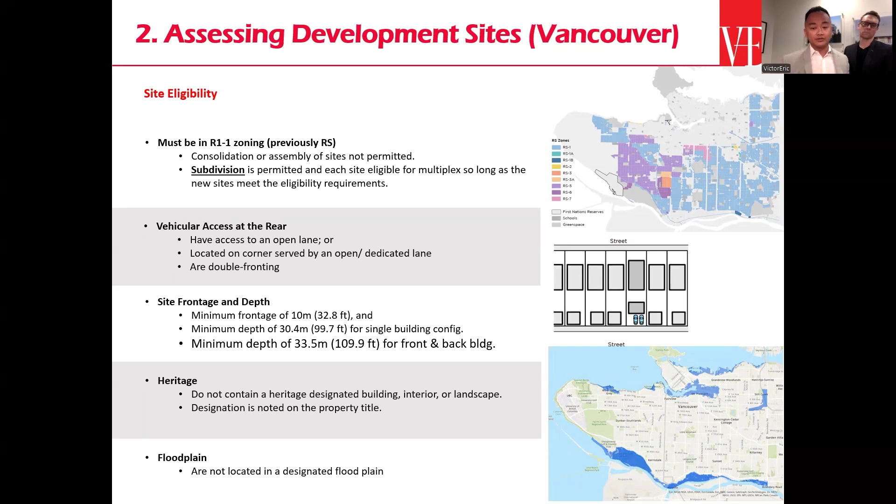Last but not least is the floodplain. As you can see on the bottom right, there are areas in the Vancouver map that are in the floodplain region. Although the city wasn't clear whether we can build there, I think the main concern is the cost of building in those areas, because you'd need to acquire a geotech engineer, which might involve pilings, significantly increasing construction costs. The city, in one of our inquiries, advises that if your lot or property is within these areas, they would strongly encourage not building a multiplex development.

The next item to cover is the site configuration requirements. This is very important for those looking to develop a multiplex, because it will give you an idea of how to configure your site—whether you want a courtyard configuration or a single building configuration type.

So what you have here in the site plan is a courtyard configuration, meaning there's a front building and a rear building. Between them is a courtyard, which requires a minimum 20-foot distance between the two structures.

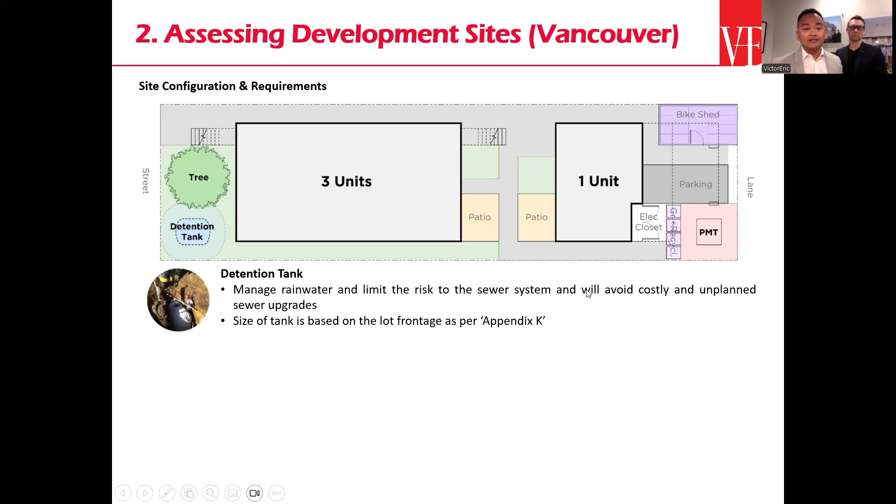In terms of requirements, there are three things the city wants us to consider, outlined below. First is the detention tank. Detention tanks are now a mandatory requirement for multiplex site development, to minimize the amount of water going into the city system.

In terms of tank size, you can refer to the appendix found in the city's website, which can also be searched via Google.

One of the reasons they're asking for this is they've been quite permissive in terms of site coverage, increasing the impermeable area allowed. Vancouver is largely on a combined sanitary and storm system, and when there are heavy rains and everyone loads into the system at once, it creates an overload situation, which is not good and can lead to all kinds of problems. The detention tank lets water from the site slowly into the city system, which it is able to absorb over time.

The next item to consider is new tree planting. There are sites in Vancouver that are heavily dense with existing trees. If your site is one of those, the city isn't going to tell you that you can't build a multiplex—you can, by any means—but there's a minimum requirement of replacement trees you'll need to provide, based on the lot size and the amount of trees being cut or removed from the property.

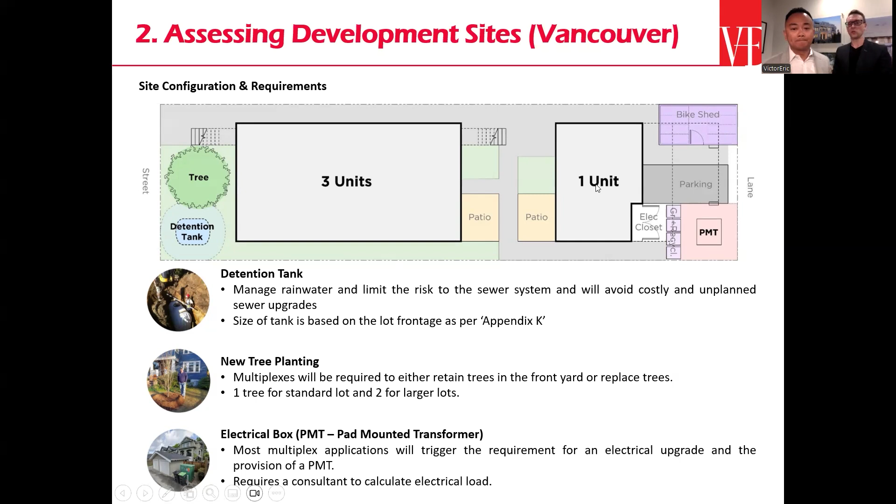Just real quick, basically Vancouver transmits its power lines at high voltage, 25, 50, 75 kilovolts. In order for the homes or a project like this to use it, it has to be stepped down to a usable voltage, 120, 240 voltage, which we all use. That's why these are required.

Okay, so moving on to what are the fees. For the city to allow you to build up to a 1.0 maximum on a standard, previously single family and duplex zoned area, they're going to want something from you in return. So the next item I'm going to go over is what we call the density bonus fee. Don't mistake it for the DCL or DCC fee, this is in addition to that fee.

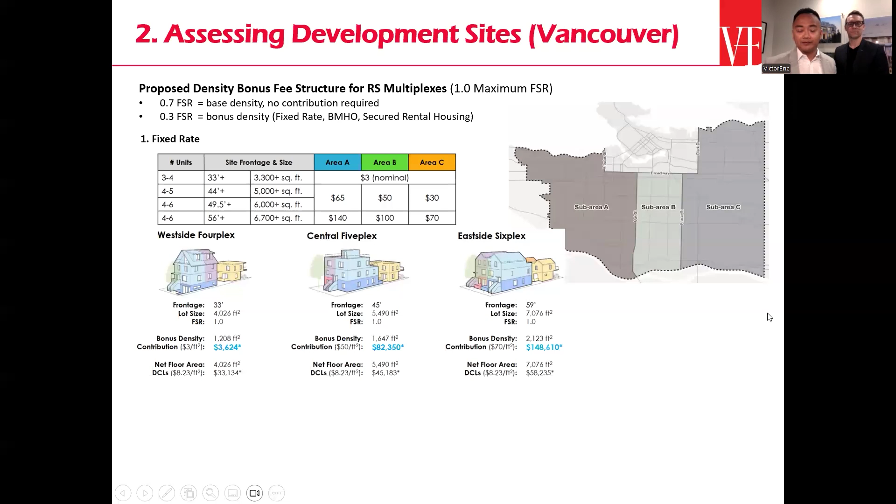So what is the density bonus? You'll notice at the top right of the sheet, the Vancouver map divided into 3 sub areas. Sub area A is to the left side of Oak Street, anything west of Oak Street. Sub area B is between Oak Street and Fraser Street, and sub area C is anything east of Fraser Street. Now why is this important?

It's important because that dictates how much density fee you're going to pay, also based on the size of your lot and the type of development you're doing on that property. So the density bonus fee is a charge on the 0.3, which is the additional density. 0.7, as you can see here, is what you're actually allowed for a duplex under this regulation. Anything above that, if you want to develop a multiplex site, will be the remainder, so you'll be charged a bonus density fee on that 0.3 of the additional FSR.

A common question people have is, if I don't use the full FSR, do I pay the full bonus density fee? And the answer is no. So if you went to say 0.9, you only pay on 0.2 FSR towards the bonus density fee.

Okay, so how is this applied to your project? There's a few examples on this table here illustrating the frontage, because the frontage dictates how many units you can build on site, and also the size of the lot accordingly. So on a 33 foot lot, the example here is a lot size of 33 by 122, that's 4,026 square feet.

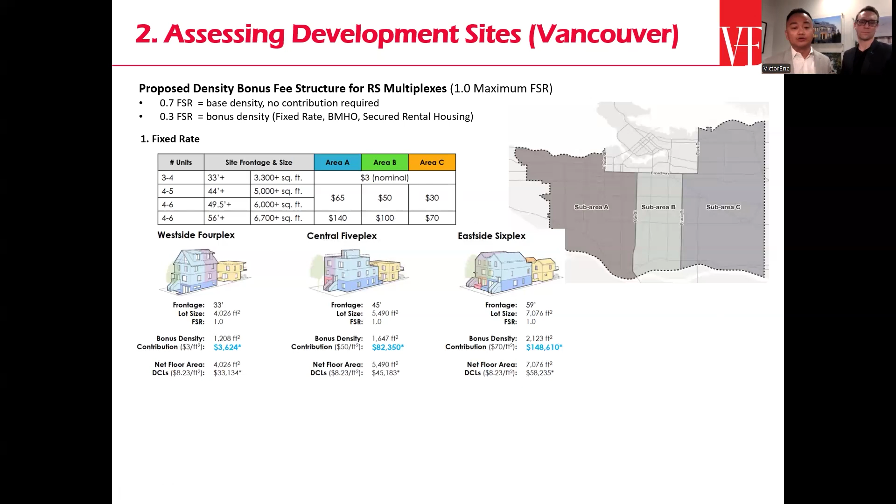Don't worry about it, I know it could be confusing, but we're here to help. If there's any question at the end, or if you guys would like us to provide you a pro forma, we'd be more than happy to do that for you, or a quick calculation as well, if you're looking to develop into multiplex.

There are options if you want to opt out of the density bonus fee, and we've outlined them below. But looking at the pro forma, there's really just two options, and so far we haven't seen anyone go that route. It seems the best option is just to pay the bonus density fee.

However, there are other options, which we've outlined here - the single below-market homeownership option, which has to be done in conjunction with the BC Housing Affordable Home Ownership Program. With this option, you'd offer one unit sold at below market, at 50% of fair market value, which is significant. If you were to do even a small unit, it just doesn't seem to make economic sense.

Especially in Vancouver, where units are costing about $1,000 to $1,500 a square foot for sale pricing. So if you give up even at $1,000 a foot, half of an $800,000 unit, you're still giving up $400,000, which on most lots would be significantly more than the actual fee.

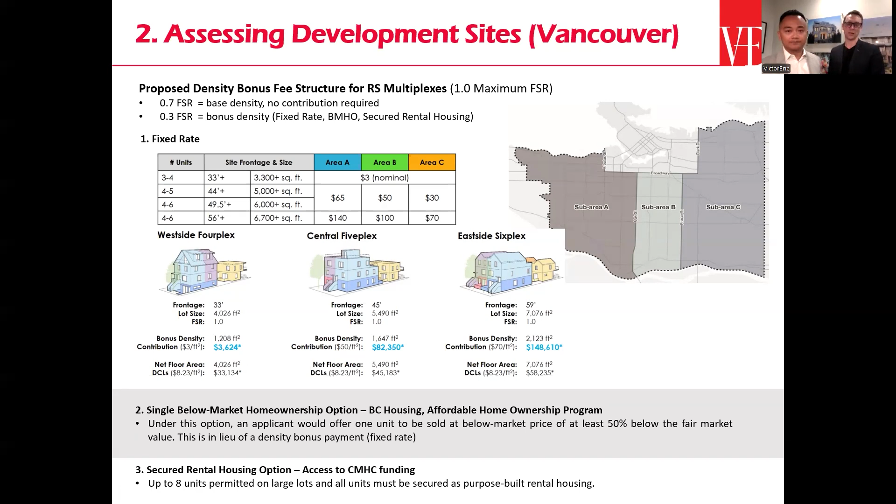For the last part, the secured rental housing option - that's if you want to go with the 8-unit route. So far we haven't found anyone doing this, and you do have access to the CMHC MLI Select program, which gives you lower interest rates and lower down payments and things like that. But from what we've seen, it doesn't appear to make sense. However, if you want a rental building, this is a good option and could be considered depending on the investor's appetite for this.

There's an additional update to the zoning regulation that the city enacted, I think mid last year, which is to add some of the restricted zones into the multiplex type development - that's the RT7, RT9, and First Shaughnessy district. Now these are restricted zones, meaning small pockets in the city which, because of the type of development, are very restrictive. Because of legislation from the province, the city is mandated to add these areas into the new R1-1 zoning regulation to allow for multiple dwelling development.

So this falls in line for RT7, RT9 with the requirement of Bill 44. And for the First Shaughnessy district, just keep in mind, because of the size of the property in that area, you are going to be restricted to just a 0.5 FSR, because at 1.0 you'd be building quite a big size development.

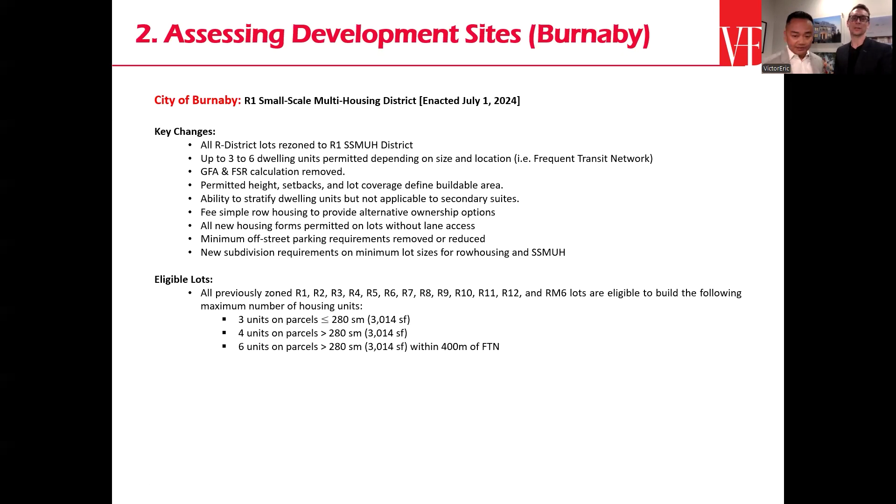Just further clarification on the frequent transit network - these are areas that include at least one bus route where a bus is scheduled to stop at least every 15 minutes on average between 7 a.m.

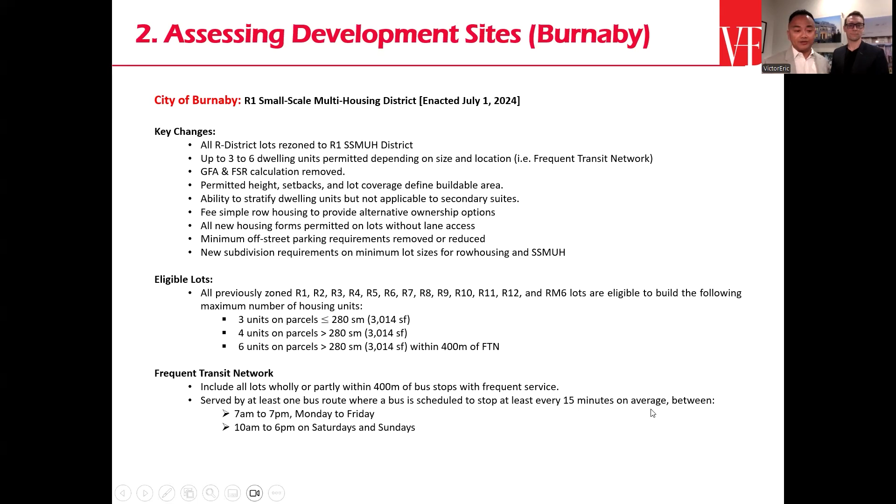You don't have to worry, because at the City of Burnaby's website, under the GIS map, they actually provide information on how many units you can have on your property. That's one thing we're quite happy with in the new update on the city's website, because homeowners or developers like yourself no longer have to guess.

And it's absolutely certain - sometimes you get cases where you're close but not sure, and you have to put an inquiry to the city. This saves all that energy, which is great.

So what you see here is just a screenshot or an excerpt from the zoning regulation. It's simplified now - it's not as crazy as it used to be. It's easier to understand, pretty straightforward.

It'll tell you, based on the size of your lot, how many units you're allowed to build, what the sizes are, your maximum impermeable, your side yards, all those kinds of stuff that you need to consider.

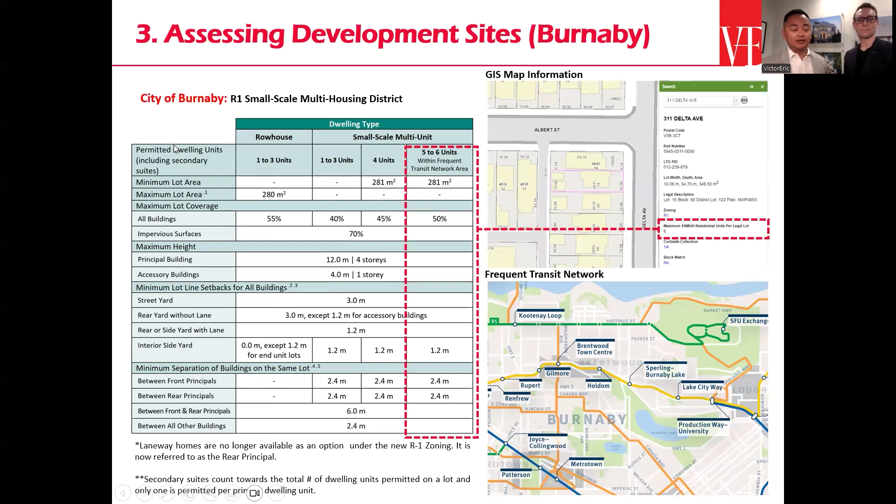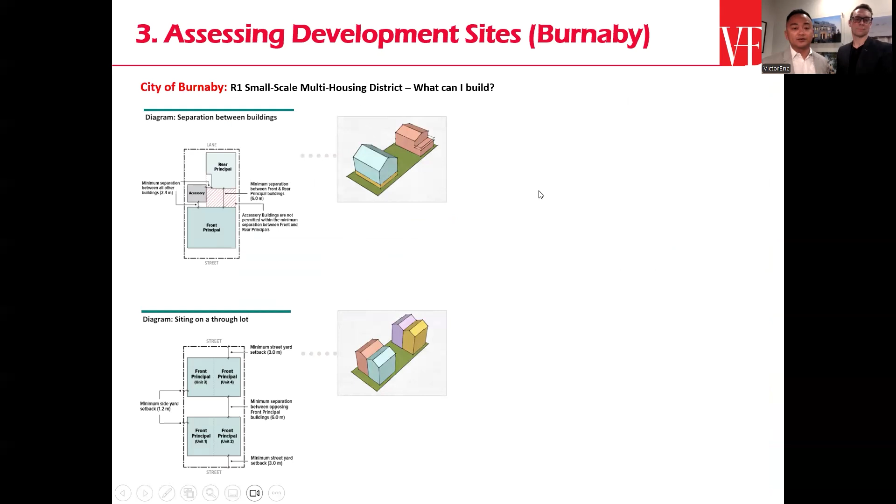Also, City of Burnaby has a lot of configuration types that you can do based on the size of your property, some of which was already confirmed by the city. For example, what we have here to the top right, you have an option to now build 4 detached dwellings on the lot, but that is of course based on the size of your lot and if it allows it.

Now, Bruce can confirm here, for development types in City of Burnaby, it's still very important for sellability to consider providing parking lots. Parking is not required, but I think from a developer's perspective, when you're selling for market, it's going to be very difficult to produce a product and not have any off-street parking. So obviously that's something you want to work hard to provide. That being said, if the product is right beside a SkyTrain or bus, maybe it might sell, but I think it's probably better or safer to definitely provide some off-street parking.

One of the big things that differs the multiplex development from Burnaby to Vancouver is its eligibility to have multiple dwellings even though it doesn't have lane access. As you can see here to the top right, this is an abutting property where we don't have lane access to the rear, and it's still eligible to build a multiplex type dwelling.

For some of the projects or feasibility that we've done for City of Burnaby, this is great. But if you want to provide attached parking for each unit, then we would encourage having the footprint of the building smaller, which would then allow a driveway in the middle or on the side to access the attached garage or units.

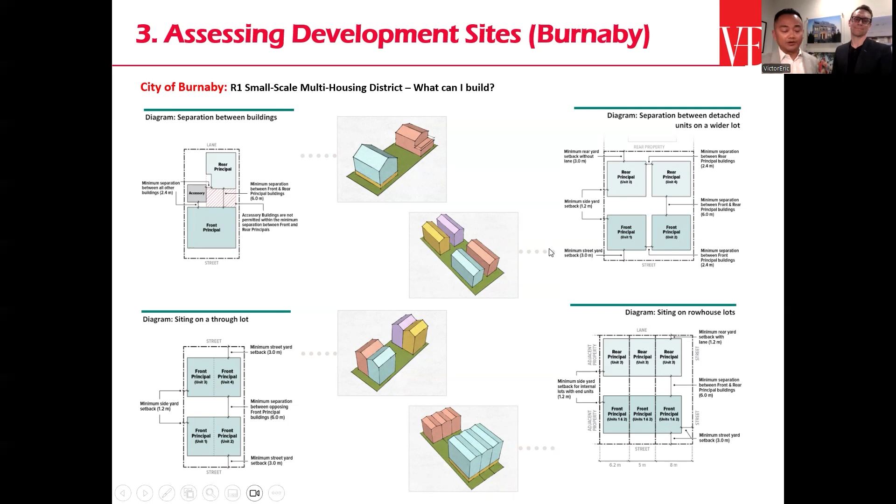Now this is just because City of Burnaby has now taken out the GFA or FSR calculation. So how do we know how much density we're allowed for our property? There's three criteria that the city actually provided for us to calculate that, and that is the setbacks, the site coverage, which I'll explain more later, and the building height.

For the setbacks, there's basically a set side yard, front yard, and rear yard setback requirement for any type of development on the property, whether you want to go with a single family dwelling, duplex, or multiple type dwelling, just to make it a lot easier for everyone to understand.

Now first thing we do is the setback. That defines your building envelope where you can build, and within that building envelope area, you'll determine how much site coverage you can have. Site coverage is essentially the footprint of the structure on the property. Depending on the size of your lot or how many units you want to build, you're restricted to a certain percentage of site coverage for the property.

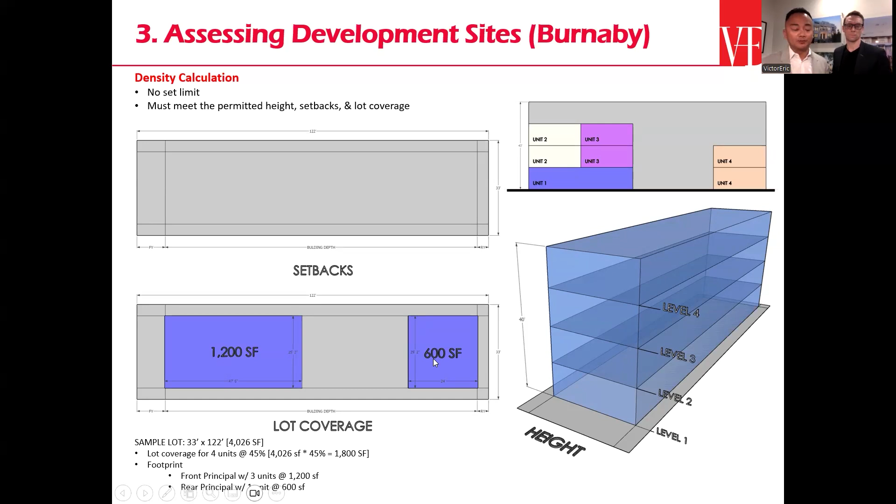DCC and ACC rates are similar to City of Vancouver.

There's fees to consider with building multiple type dwellings, and as you can see in the table here, if you want to develop multiple dwellings on your property, you're looking at about 80,000 per dwelling unit on the lot. But if you're building into a multiplex, they have a credit system which cancels out 1 unit from the total amount of units you're proposing.

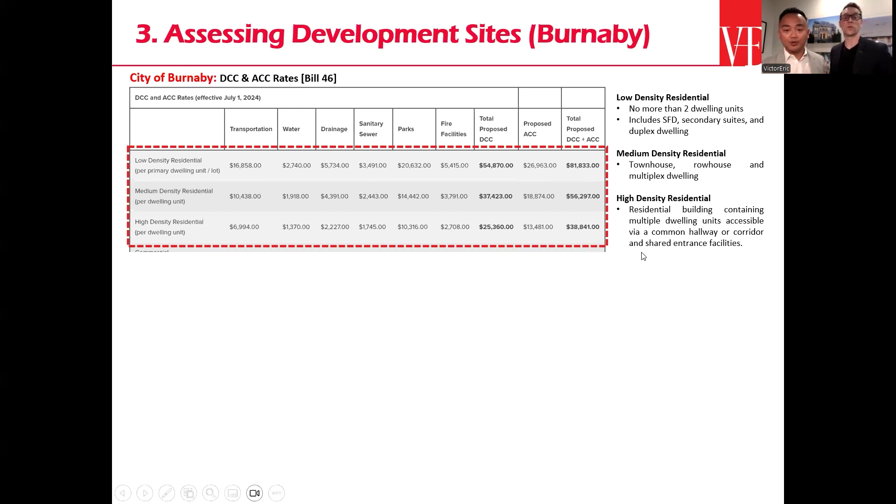So for example, if you have a single family home that you're demolishing and you're building a 4-unit multiplex, you'd be charged 4 minus 1, which is 3 times that $56,000, and that would be the fee for that. For 6 units, you'd be charged 6 minus 1, or 5 times the $56,000.

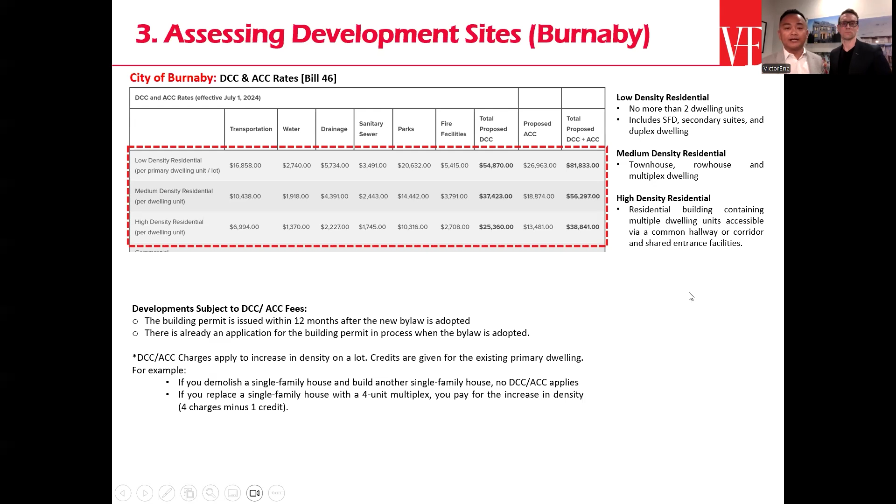We'll help you out with the calculation here. We have a direct contact at the city who usually helps us with the fee calculations. I'm more than happy to provide a more approximate number for you, whichever or however many units you're looking at developing on your property. Okay, so that's for City of Burnaby.

Now we're going to look quickly at the issued B.C.'s housing designs catalog from the province. What is this? Just high level, this is basically to help out any of you, like homeowners or developers, who are looking at what can I do, what can help me with going into or developing a multiplex type development.

This basically answers like 15% of the first step that we would typically be doing, which is providing you with the concept plan. So what this catalog provides is a few floor plans or space layouts that you can look at, depending on the size of your lot. It's very comprehensive, I think an 80-page catalog. It has most of the standard lot sizes for British Columbia taken into consideration. There are a few design types, design styles, and guidelines to consider as well.

But again, this is just for 15% of the design hours. You still need somebody to put that into a permit application type package, where we would be more than happy to help you out.

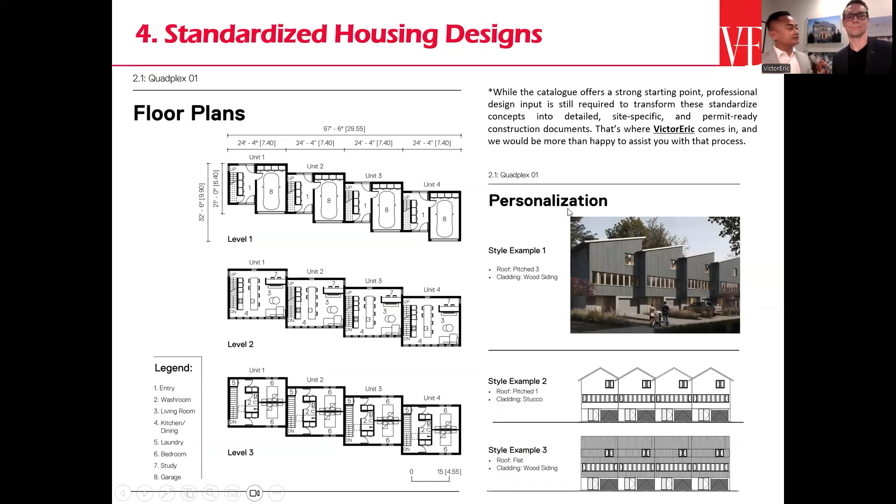Okay, so we're going to talk about some project pitfalls and solutions. The first one is accidentally going into Part 3 of the building code. Part 9 is the simple residential part of the building code, and there are certain things that can trigger yourself to get into Part 3, which will make your project more expensive.

Some of those are exceeding 4 units in one building. So if you do 6 units on a lot, you just want to break that down into 2 buildings. You can still be within Part 9. The other one, as Allan alluded to before, is travel distance, and going to 4 stories may be permitted, but it's definitely going to kick you into Part 3, which increases your costs. Basically you'll have increased consultant and construction cost, a more complex project team, and a longer construction process in general. The solution is pretty simple: stay within Part 9 where possible.

So that's one. Next we're going to talk about site restrictions. There can be a lot of them, and you really want to make sure you understand all of these. We've had many people buy lots over the years and be very disappointed because of some restrictions that they were just not aware of.

City right-of-ways and easements are a big one, and those can really restrict what you can build and where you can build on the property. Next is environmental riparian setbacks. If you've got a creek or anything on the property, or it's located near a body of water, there are certain setbacks that need to be followed, and they can be quite restrictive. After that, hydro setbacks and restrictions.

Hydro has been a pretty hot topic lately. They have started enforcing rules and regulations that they say were there all the time, but have not been enforced for many years. As a result, there's probably some properties in Vancouver and Burnaby that are difficult to develop while following all their new regulations and setbacks. So it's really important to understand those before you purchase a property. If you already own the property, well, you have it, but if you're thinking of buying a property, these are definitely things you want to consider.

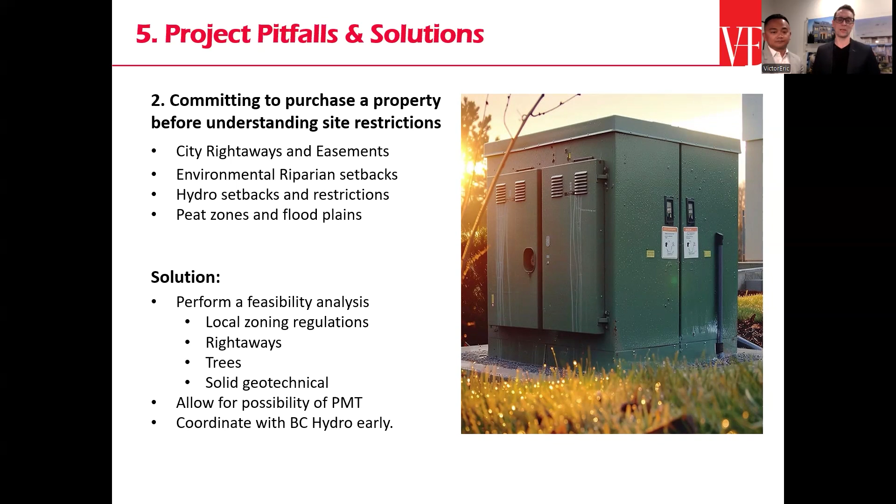The other thing with Hydro is coordinate with BC Hydro really early. Hydro is unfortunately undergoing some challenges right now, and they have a bit of a challenging track record lately. There's quite a few projects in the city that are complete, but they don't have power, so they can't convey, and people can't move into their units. So getting on top of Hydro really early, and if you do need a PMT, making sure that's coordinated well in advance, and you're doing everything you can, because that process is quite onerous and takes quite a while to get through.

Okay, next pitfall: involving the sales and marketing team too late. This one is more along the lines of developing a product that's not aligned with the target market.

I think in Multiplex especially, we really need to be careful here because there isn't a lot of historical data showing what is a good product, but we can kind of guess that we're following along the lines of duplexes and townhouses. So we want to make sure we're producing a product that's going to align with the market. What I want, what Allan wants, and what Alejandro wants are all different. So we're going to be relying on the sales and marketing team to make sure we're appealing to a broad market, and we don't have a niche market that's going to be a hard unit to sell or sell at a low price.

Solution - this one's obvious: engage a real estate marketing team prior to project commitment. They're even going to help you with things like what do you expect for the unit sales. They're not just thinking in terms of dollars per square foot, they're thinking in absolute dollars. They're thinking about where it is, what you're offering, what amenities, how much parking, or how much parking you're not providing. All those things are really important. Sometimes things look good on paper, and they just don't pan out, so you really want to make sure you have a solid team engaged early.

Next one is poor choice in contractor and consultants. Selecting contractors and consultants with no Part 9 multiplex experience - it's very simple. There's lots of consultants that are great, they do towers and big projects, but they're probably not the most appropriate person to do these little projects. So we want to make sure we're selecting the right contractor and the right consultant with the right experience - vet them for relevant experience.

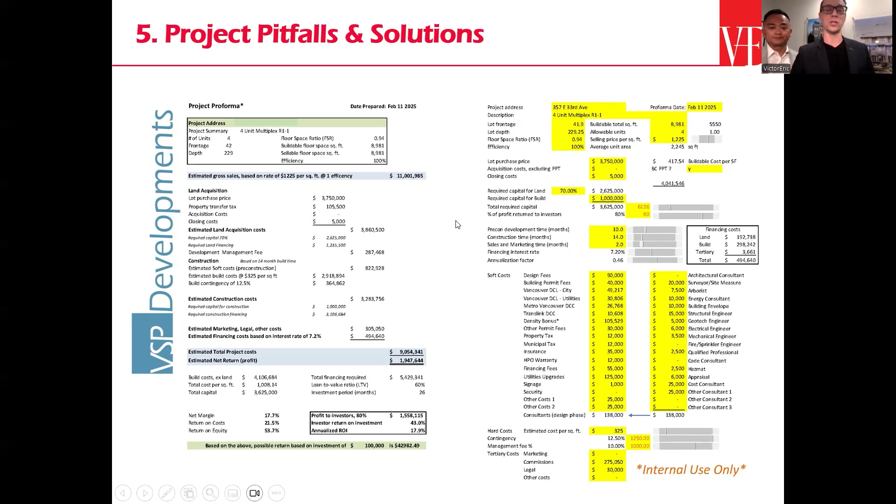This sample project pro forma is definitely something we can provide you after or during the consultation, as long as you give us the lot size and information regarding the property, and maybe some of the assessment value. There's also a whole bunch of variables, one of them being the sale price, which relies on our sales and marketing team. We have enough experience to do a guesstimate, but we need to make sure we're hitting the mark with the type of project and all those things.

Be on the leading edge of the multiplex opportunity. How does it work? Partner with VSPD. We can do feasibility to explore the viability of the project. You can vend in—if you have a lot, you can put some of that equity towards a project, and we're happy to consider those. Of course, we develop it: finance, design, build, and sell. We have quite a variety of product offerings—we can help by becoming a general partner, or we can just be a service provider with the appropriate services you need.